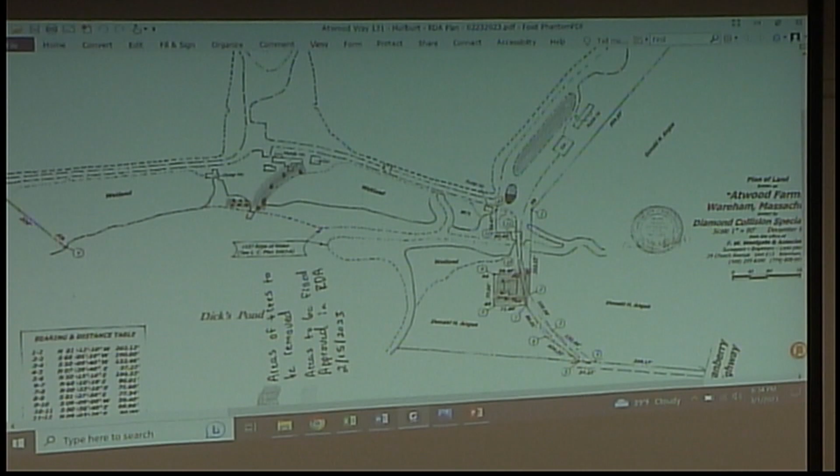Okay, does anybody on the board have any questions? Start with Carol. I have no questions. Mike? No questions. Kwame? No questions, thank you. Autumn? No questions, thank you.

May I have then anybody from the audience who wishes to speak to this project? Seeing none, can I have a motion to close the hearing? So moved. Second. I have a motion to close and a second. All those in favor? Aye. Opposed? Abstained? The vote is 4-0-0 to close the hearing.

I move that we accept this project. Is it a project? It's an RDA, with a -3 determination, with the stipulation that Mr. Faraday meets with Mr. Hurlbut and discusses the trees, and they agree upon which trees are to be removed. I'm so sorry that I don't hear well, could you repeat that please? It's a -3 determination with the condition that Mr. Hurlbut meet with Mr. Faraday to discuss which trees he wants to remove and that they agree upon that prior to any work being done.

I have a motion and a second. All those in favor? Aye. Those opposed? Abstained. The vote is 4-0-0.

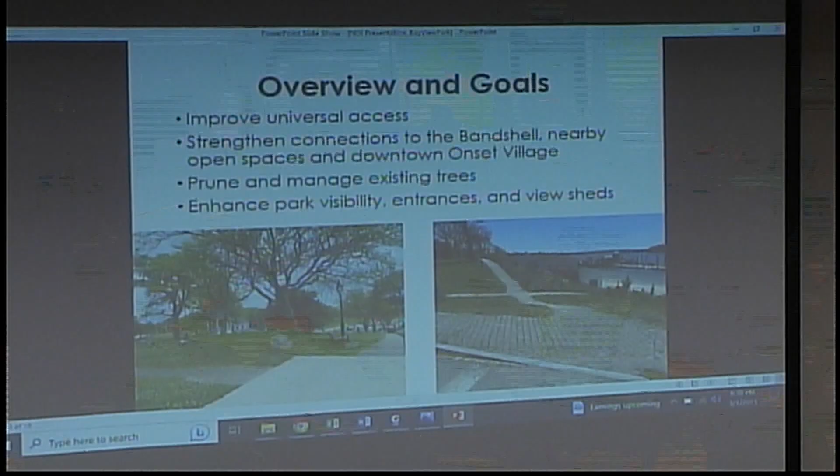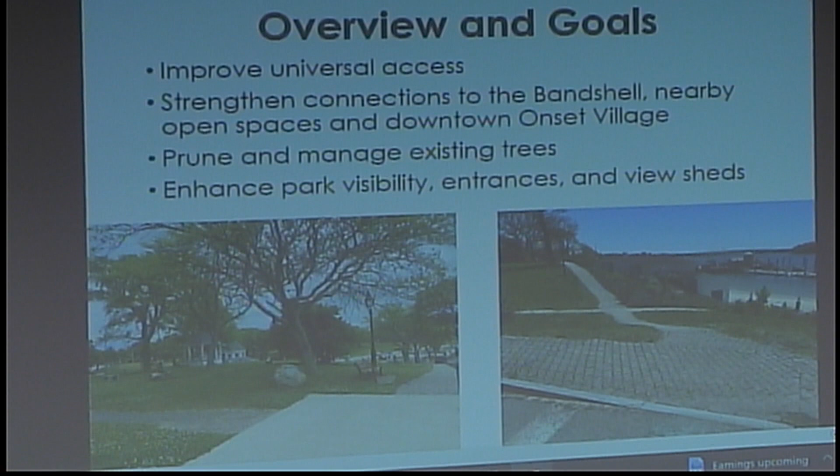The project is focused on providing universal accessibility throughout the park. It's currently a park and will continue to be a park. The moves are really to make this place accessible, since it's currently not. We also are looking to strengthen connections to the bandshell that currently exists in the park, to the nearby open spaces, and to downtown Onset Village. We've also done an extensive tree assessment, and we'll be looking to prune and manage those existing trees, keep them, and add to the stock that's there. We'll also be enhancing the park's visibility, the entrances, and view sheds throughout the park. Next slide.

So you see some views of the existing conditions and some of the lack of compliance that we currently have. There's a connection in the upper left image showing a pathway down to the beach from the top of the park that's not compliant currently; it's a stair set that's fairly unsafe to walk on. The image on the right shows the views we hope to enhance. The lower left image shows pathways also very much out of compliance, going up very steep hills—there's significant grade change within this park. You can see the McFadden Center on the left side of that image. The lower right image is the condition along Onset Ave, where we're looking to widen that walkway to allow for all of the public use along that sidewalk. We're also looking to make that guardrail safer and generally improve the condition and safety within the space.

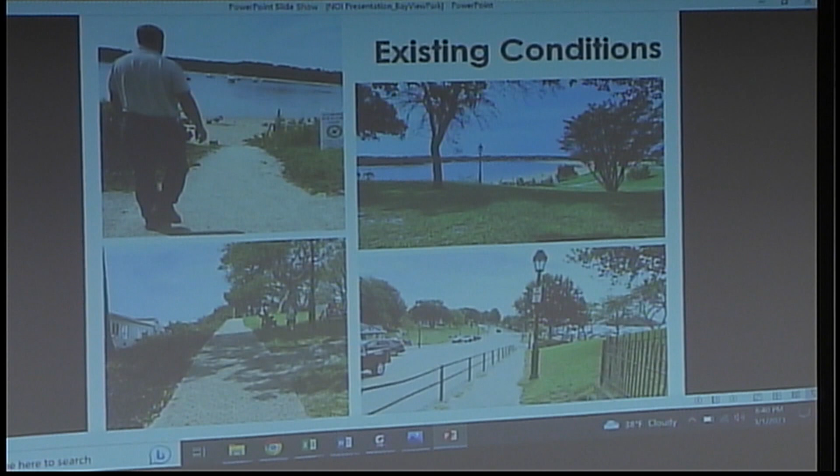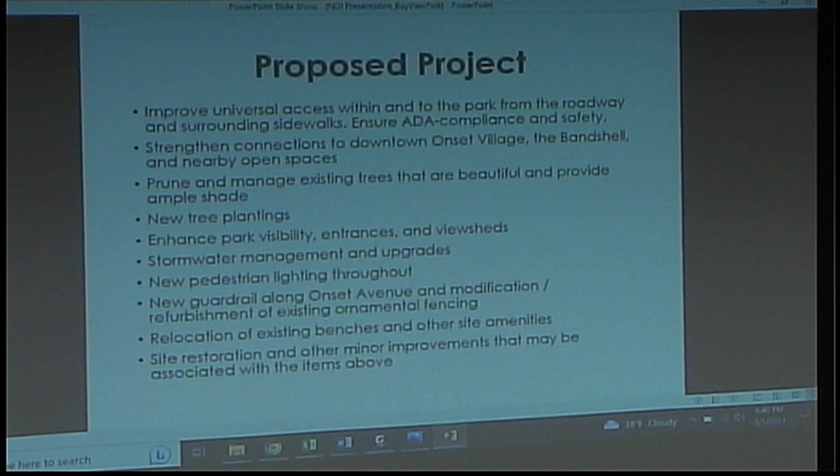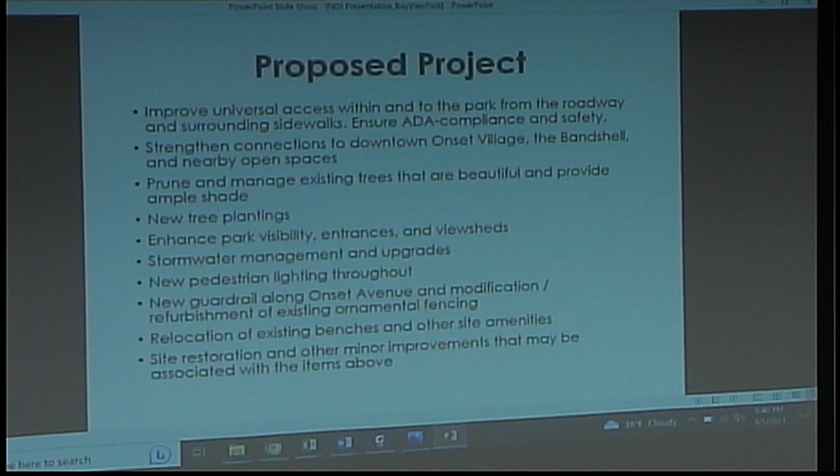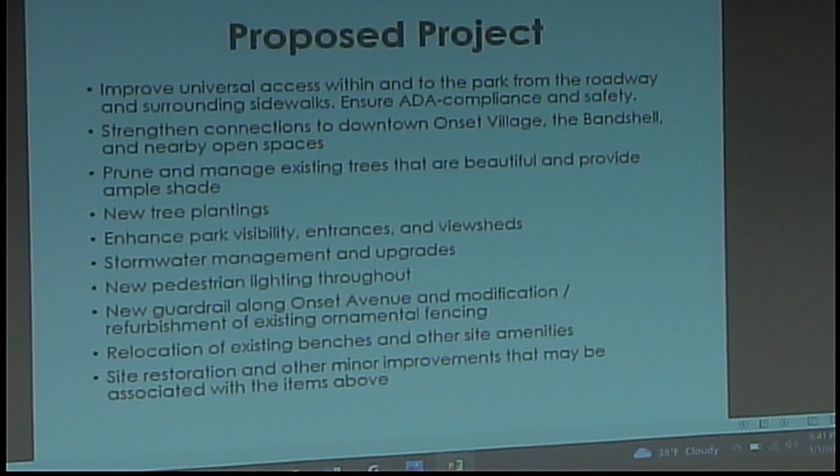Next slide. Generally, the proposed project is to ensure ADA compliance throughout this space, ensure connections are strengthened, and continue pruning. I'll skip to the new stuff: we'll be adding stormwater management to the park, including rain gardens of native plantings that will collect stormwater on site and infiltrate or convey it out. We'll be adding new pedestrian lighting in keeping with the lighting that currently exists, upgrading the guardrail, and cleaning up the ornamental fencing around some memorial spaces within the park. We'll be relocating benches onto pathways so they're accessible and capture view sheds, and we'll be restoring the site—loaming, seeding, amending soil—to make sure the soil is healthy and can support passive recreation use in the park.

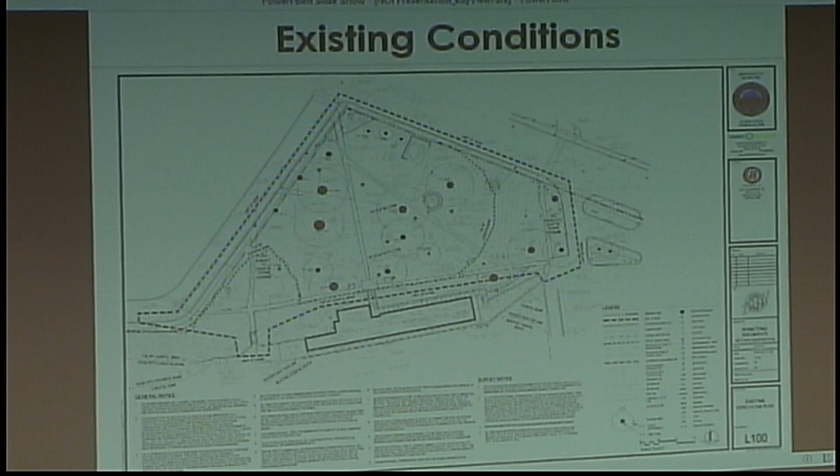We also are marking on this plan the coastal bank and the lands subject to—the top of bank is marked in dashed lines. We also have the 50-foot no activity zone and the 100-foot buffer zone marked, and that work will sit within that area as well. Next slide.

In terms of site preparation and demolition, we have marked on the plans erosion controls for straw wattles and siltation fence to protect construction activities from moving into any of the water bodies. We also have tree protections in place. There are two different types based on where work is occurring.

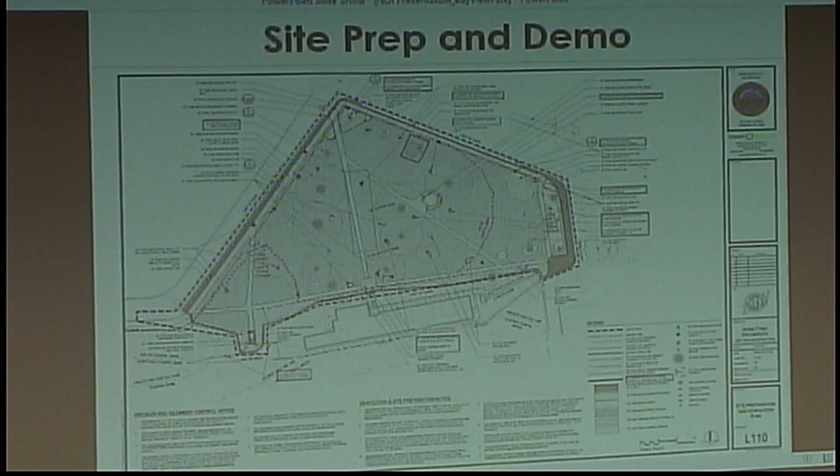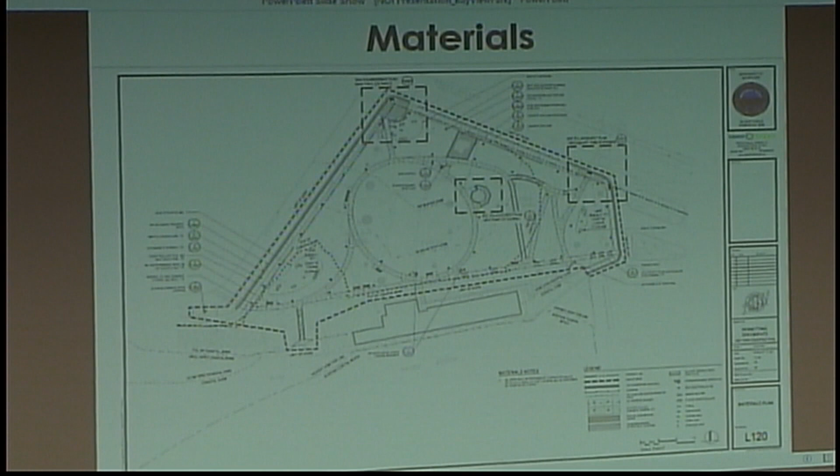This is a materials plan which shows the proposed condition. It's a series of walkways, ramps, and stairs that will improve and reorient circulation through the space. We're also adding a stair going down to Onset Beach that we'll discuss in more detail in a little bit. We're essentially replacing in kind within this current condition, but it does cause quite a bit of grading to be done in that area.

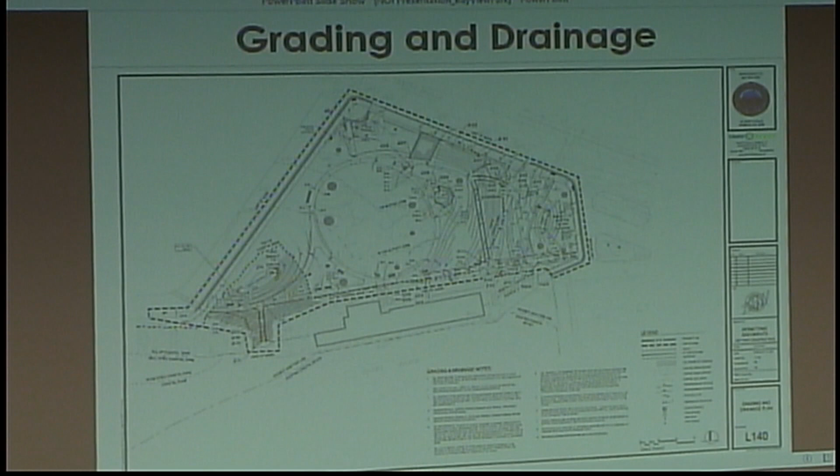From a planting perspective, all the planting selections we're calling for currently are native. We're adding new native trees, adding shrub and understory plantings within either rain garden spaces—there are three—or slope stabilization between the park and the McFadden Center for areas that are disturbed.

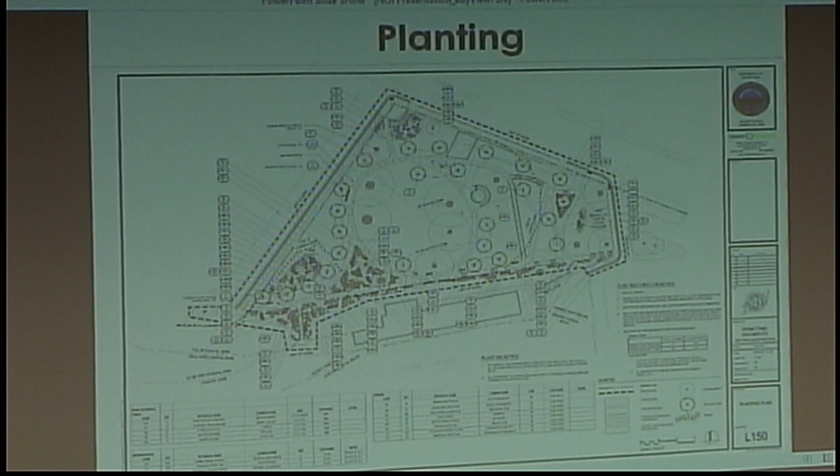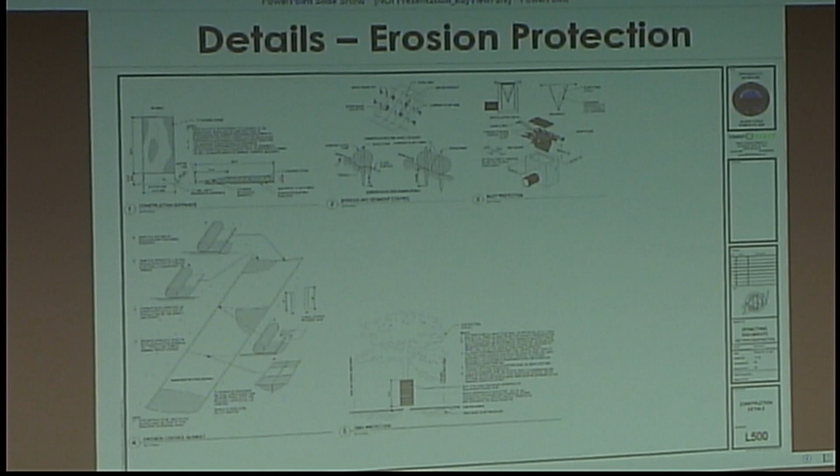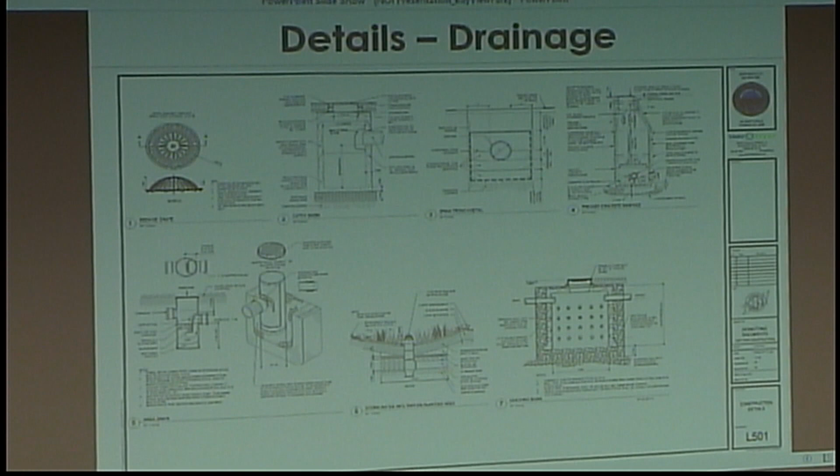We included a few of our pertinent detail sheets that we thought Concom might be interested in, including our details on erosion protection. We have drainage details included for the rain garden system, and some utility connections. We're adding a hose bib for the rain garden plantings, and that's really it in terms of electrical for lighting as well.

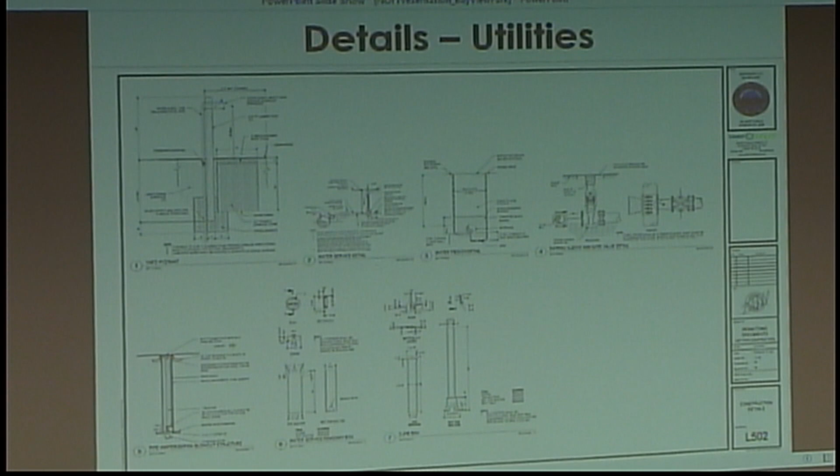This is where Megan will come in on the impacts. As Cassie mentioned, there are a few resource areas out on site. This table was just copied from the notice of intent application, but I'll run through some of the impact numbers again. For coastal bank, we're proposing 379 linear feet of impact, some permanent, some temporary. As there'll be some pavement, we're calling that more permanent impact. Temporary is returning the existing park back to the existing park in the lawn area.

There's about 17,416 square feet of work in land subject to coastal storm flowage, which is the flood zone out here, and about 13,631 cubic feet of fill on site. As Cassie mentioned, we're dealing with some significant grade changes. About 53,000 square feet of work will take place in the 100-foot buffer zone, and about 38,821 square feet in the Wareham Wetland Bylaw no-activity, 50-foot no-activity zone.

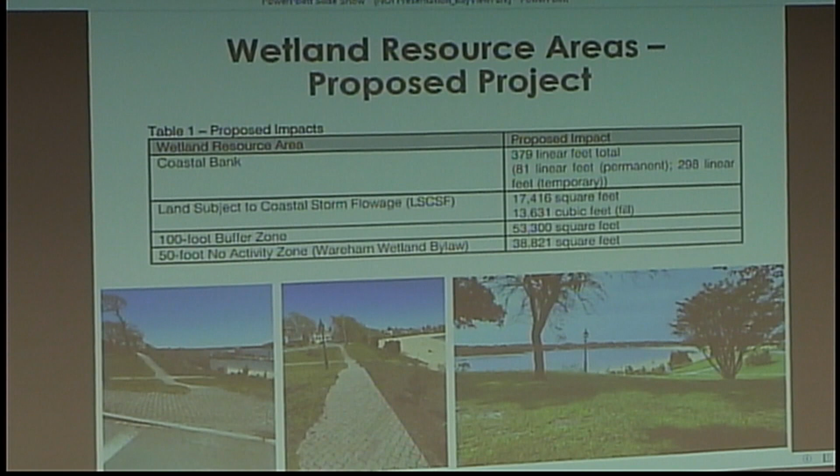These bottom photos are just representative of these wetland resource areas out on site. This is mostly coastal bank and land subject to coastal storm flowage in the site. It's existing grass and walkways right now. This figure is just an aerial showing these different resource areas on site.

I'll start at the beach for the approximate land under ocean and work my way towards the park. So we've got land under ocean, which then goes to the approximate coastal beach. From coastal beach we have coastal dune, which is between the yellow line and the orange line shown on this plan. We did make a designation between vegetated coastal dune and coastal dune, just because there is an area that has the very typical dune vegetation with ammophila, and then there's mostly just sand in the other area, but it is coastal dune, so we made that designation. There's no work happening in coastal dune out here, but it is nearby the site.

And then the pink line is the coastal bank line. This mostly follows the 100-year floodplain, which is why it has some crazy bump-outs within the park. That's at elevation, I believe, 19 and 22—there are two elevations on the park. You'll see where, mostly by the McFadden Center, it changes from 19 to 22.

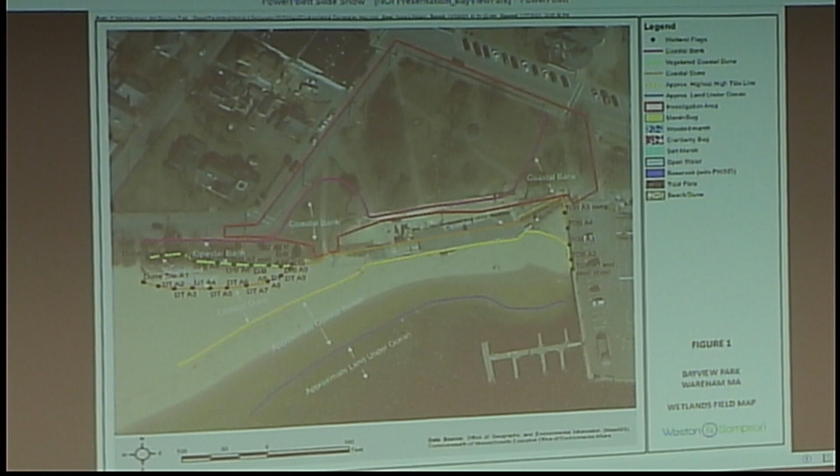And the coastal bank line was determined using CZM's guidelines for the slope. Next slide, please. Now I'll turn it back to Cassie.

So we are considering an option for the stair that we're replacing down to Onset Beach on the South Boulevard side. We are aware that the pure replacement of the stair actually causes significant grade disturbance of the slope.

And so we are considering an option where we elevate a stair. The disturbance would then become the footings that would support that stair going down into the slope. We also are considering an ADA compliant ramp along that edge that would also be elevated. So this entire system would be elevated above the slope, thereby impacting that slope in a less significant way than it would as currently designed.

There is interest in the town to provide ADA accessibility on this side of the park from South Boulevard down to Onset Beach. So we wanted to offer this option to Concom to see if it may be allowable in a future submittal or amendment to this application for us to incorporate into the park or into the plans. Next slide.

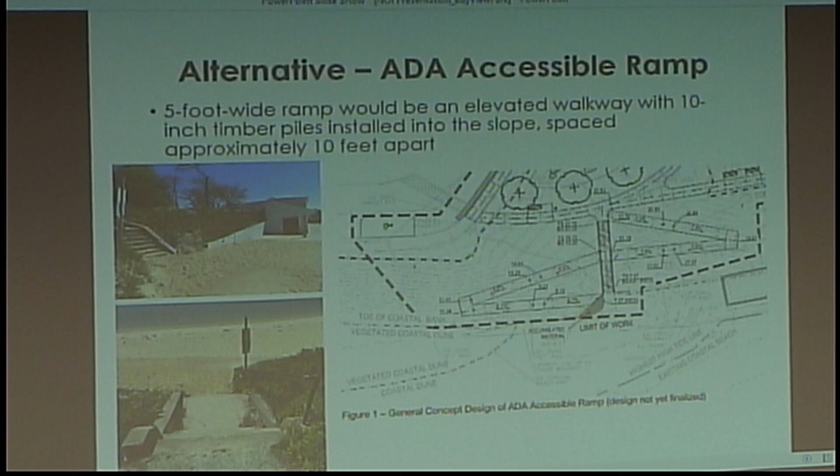So we looked into just approximating what wetland resource area impacts would take place with this ADA accessible ramp, understanding that it hasn't been designed fully, so these are very approximate numbers, but just to get a ballpark, it would be approximately 1,180 square feet in land subject to coastal storm flowage and 1,350 cubic feet because the ramp itself would be thick and you would have the footings down into the slope, and it would be about 236 linear feet of work on coastal bank.

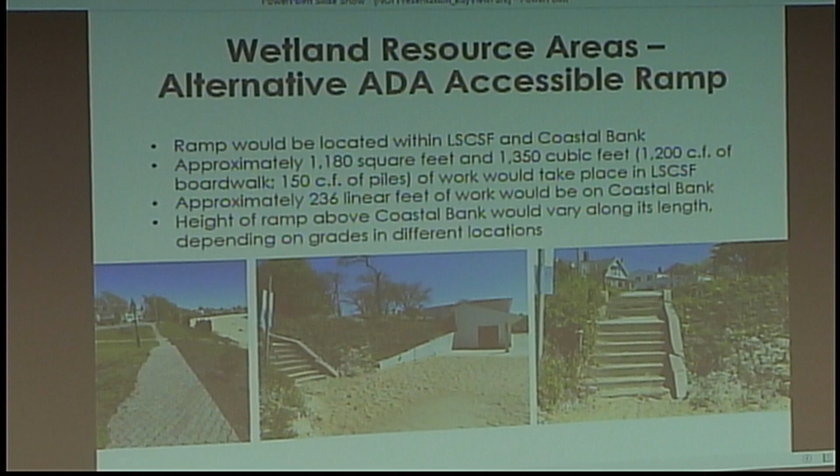And there are some permitting challenges with this, because the ramp would need to be designed so that it would not be considered a coastal engineering structure. If it is considered that, it'd be more challenging to permit this ramp. I think that concludes our discussion, and we welcome any of your comments and questions.

Josh? Sure. This might be, the amount of trees that are being removed, I assume, and it looks this way, but are there more trees being added than being removed? Yes. That's what it looks like, okay.

I think the only trees that will be removed are, there may be one or two that are in poor health. And then there are one or two that are just maintenance nightmares for the town, that are like large shrubs, essentially. Yeah, they're not the large trees. I know some of the trees that were discussed were along South Boulevard, and some of them are in very poor health. I'd agree with that.

Speaking of the ADA accessible ramp, I know in one of the plan details, you plan to add parking for ADA accessibility on South Boulevard. How many spots is that? Currently proposed are 2 spots. These would be parallel spaces at the point where the roadway bends. So they would just be painted spaces. There would be no change to the roadway. Okay.

If you get approved for, let's say, a staircase tonight, does the design of the staircase allow for the addition of the ramp without any modifications to the staircase? Or would that just be a planning nightmare? So you mean if the stair is designed in the current permitting set is one that is set into the slope? We're asking the commission to consider an option where we elevate that stair and add an accessible ramp, if that would be looked upon favorably for less disturbance, then we would broach that with the state and see if it's permittable. But at the moment, we would not be planning to add a ramp set within the slope, if that's answering your question.

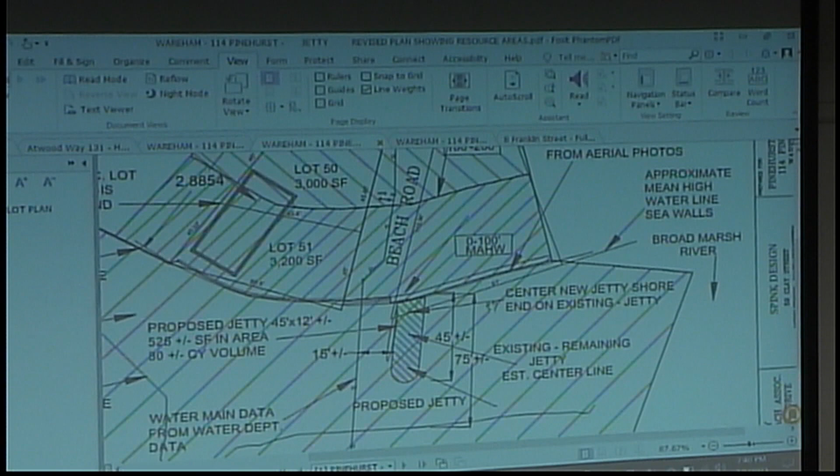So when we said, can we move it, he said no, because now you're building a new jetty. So if you're trying to repair the existing one that's one thing, building a new one is something else. But the jetty is on her property, not your property?

That's why they're doing a jetty survey. It is on our property, what's questionable, and we will now determine with a survey. So we were told there was an existing survey, but she refuses to produce it. It's probably a plot plan, there's no marks, no pegs anywhere, and as you know, a plot plan's not sufficient to determine boundaries.

So if her wall is on her property, her opposition is that our wall would attach to it. If it's on our property, that's a whole different conversation, ballgame, because ultimately, if you look at that wall, it's going to collapse. Yeah, her wall is in disrepair as well, definitely, for sure. She's got a house behind it.

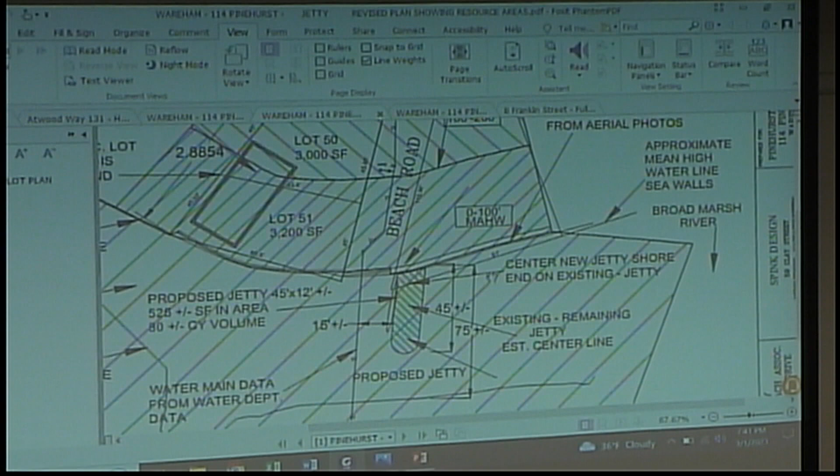The way the commission has to view your project is that you are potentially doing work on someone else's property, and that's why we cannot make a decision tonight. Absolutely understood.

So what our hope is that now that we have the DEP number, we'll proceed with the Chapter 91 license and proceed with getting a survey done. So we would like an extension to come back. I just started to talk with engineering firms to do the survey, so I don't have any idea whether that's something I can get done in 2 weeks or 6 months.

I just don't have any clue how long their timelines look. If we continue to March 15th, you would just come back to us and let us know if you need to continue it further? So, yeah, we can do that, or would it make more sense to continue it to the 30th?

We don't meet on the 30th, it's the first and third Wednesday of the month. So whatever the first Wednesday in April is, April 5th? I believe so, yes. Does that make sense to you? Sure, that gives you more time to get your ducks in a row. So what we need to do is get the survey done, and I think that will determine whether there's a different level of cooperation needed.